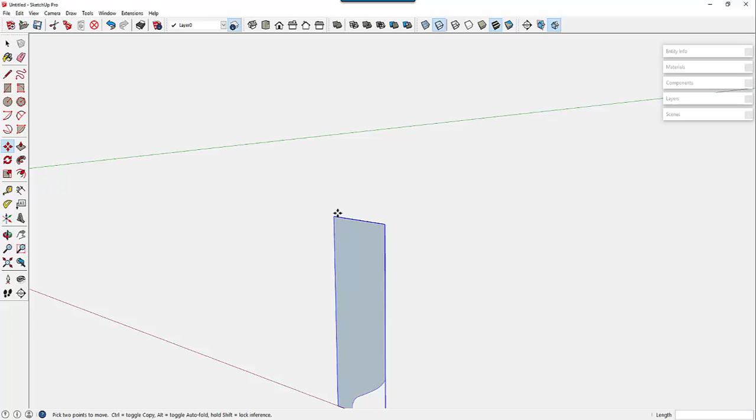To complete the end components, begin by copying the half shape with the Move tool. Move it down the red axis. Right-click on the copy and choose Flip along the group's red axis. Then use the Move tool to mate up the two halves.

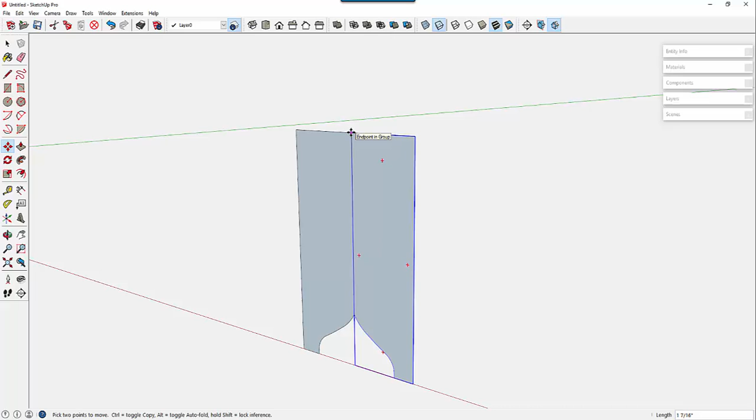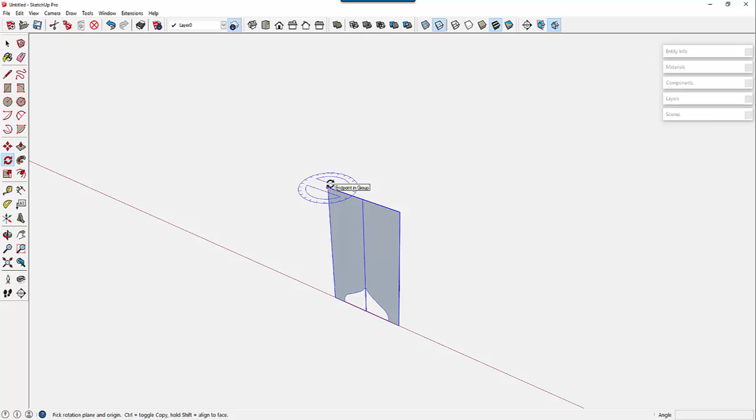Pick the Select tool and draw a left to right select box around both halves. Pick the Rotate tool and click on the top end of the end, then click on the opposite end on the red axis. Rotate the end 90 degrees until reaching the green axis.

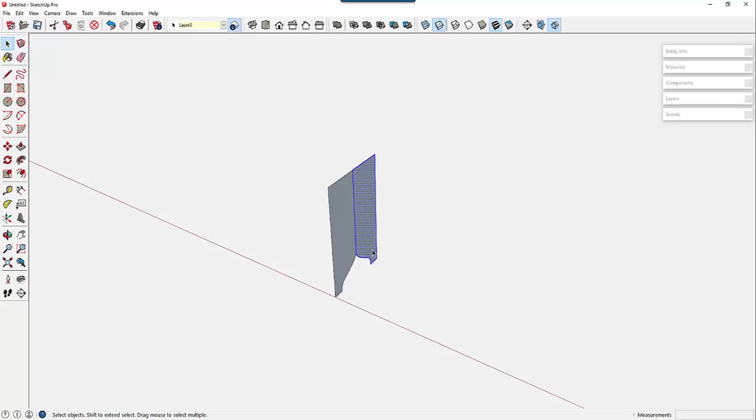Right-click on each half or group and pick Explode. Then, with the Select tool, draw a select box around both halves. Right-click on the selection and pick Make Component from the menu. Name the component End and click Create.

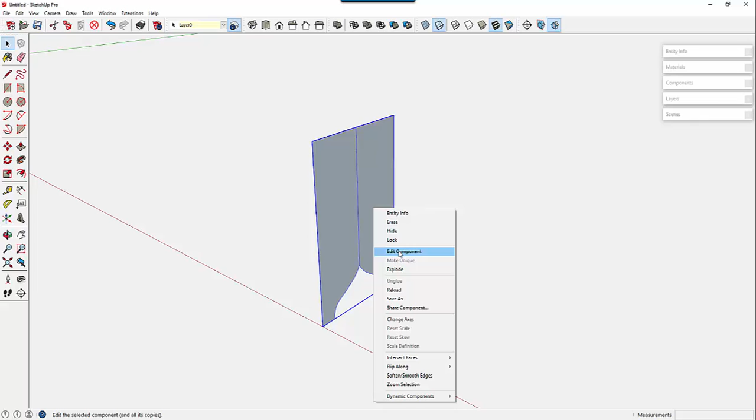Edit the component. Select the eraser and delete the center line. Choose the Push-Pull tool and give the component a 3/4 inch thickness.

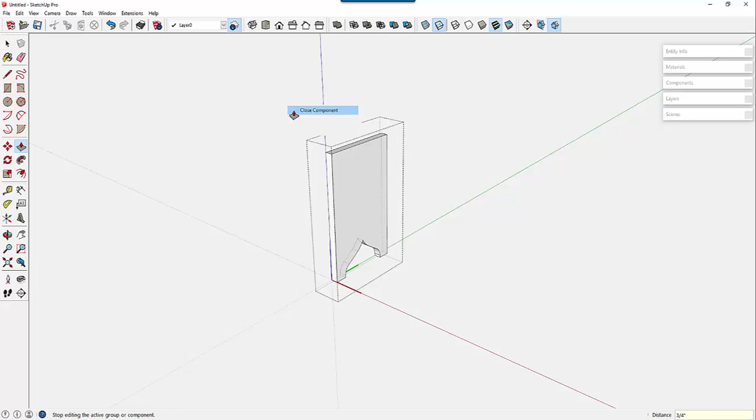With the tape measure, click on the inside edge of the end and move the mouse down 19 inches. That is, type 19 and hit Enter. The outside-to-outside dimension is 19 inches.

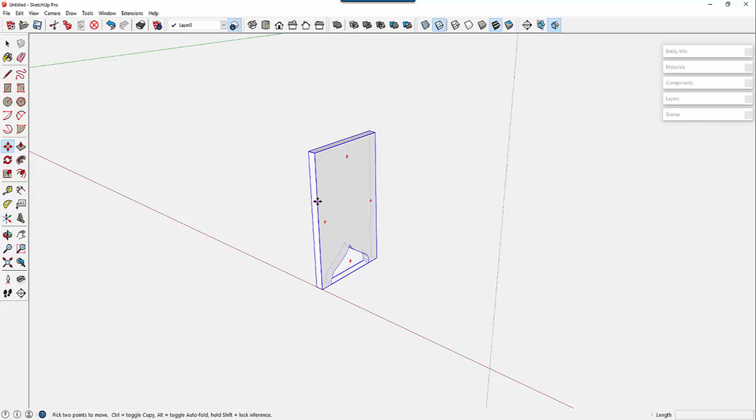Choose the Move tool, tap the Control key, click on the outside edge of the end, and move the copy of the end down the red axis. Click when reaching the guideline. Right-click on the right end and pick Flip Along Component's Red.

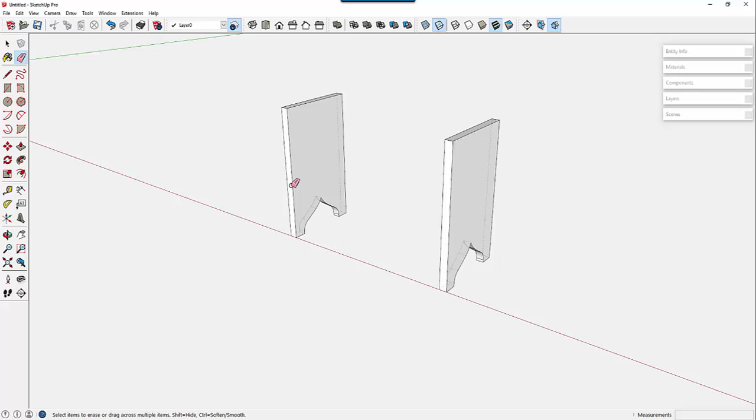Delete the guideline. Zoom in to the inside face of the left end. Pick the tape measure, click on the bottom edge, and raise up a guideline 4 1/4 inches. With the Line tool, scribe the size of the groove.

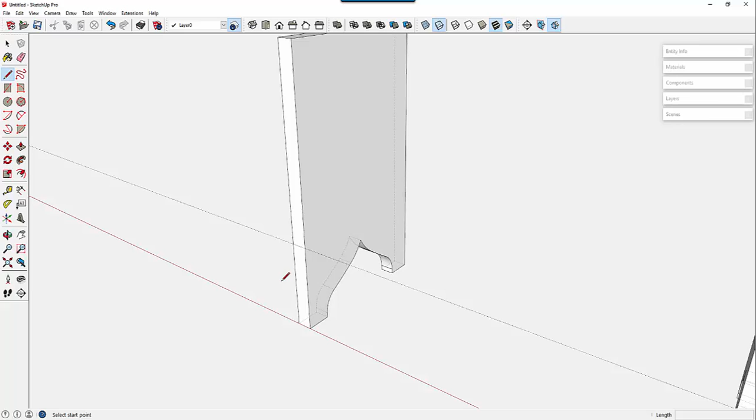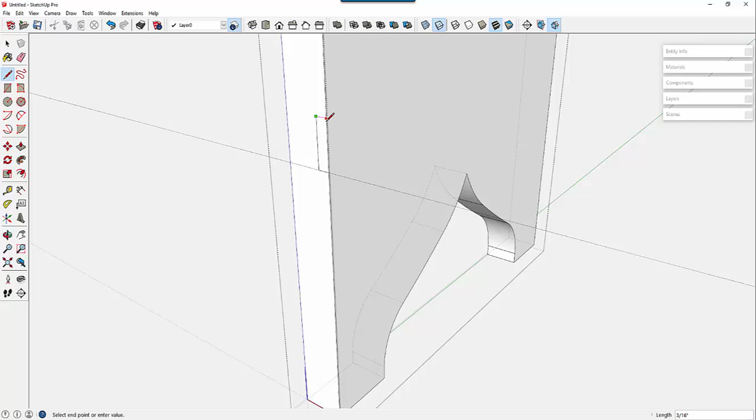Oops, I forgot to open the component for editing, so we need to stop and undo, edit the component, and then scribe the size of the groove.

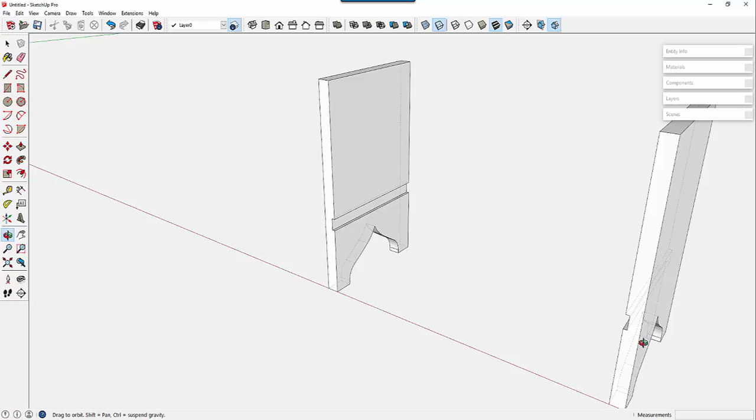It's 3/16 inch deep and 3/4 inches high. The Push-Pull tool will route out the groove. Click on the back edge and then delete the guideline.

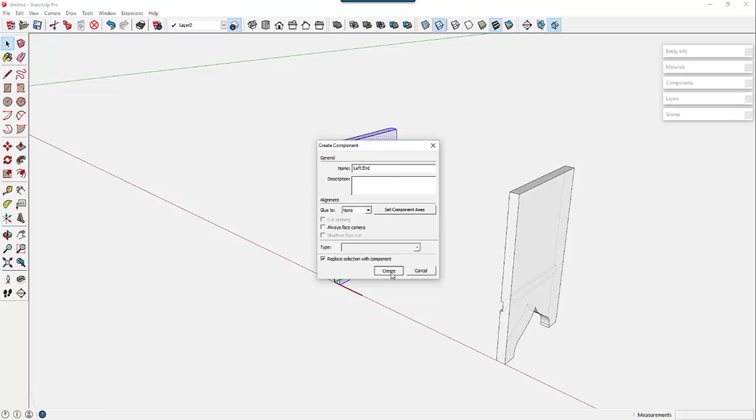Since the right end will have an extra groove for the till, we need to make these two unique components, not the same. Right-click on the left end and choose Explode from the menu. Right-click again and choose Make Component. Name the component Left End and click on Create. Repeat the same actions for the right end, naming the component Right End.

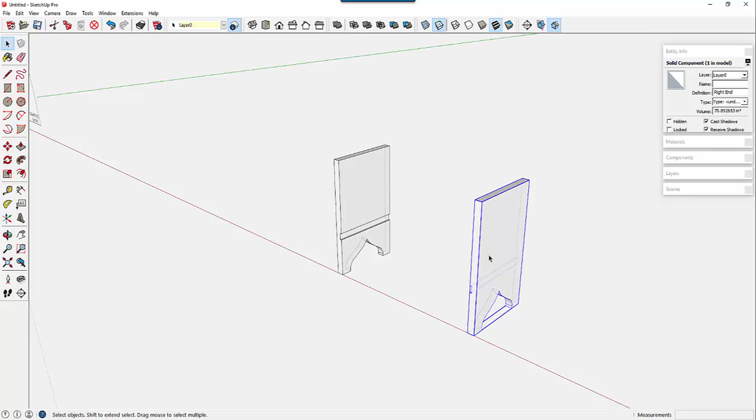You can check the component definitions by opening the Entity Info dialog box up here and verify that the selected component is in fact called right end and left end.

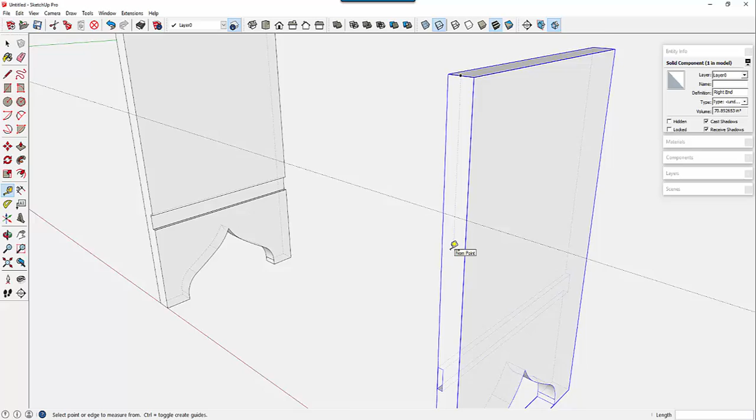Now to the till groove with the guideline. Make a guideline 3.5 inches down from the top edge of the right end. Edit the component and use the line tool to outline the size of the groove for the till bottom.

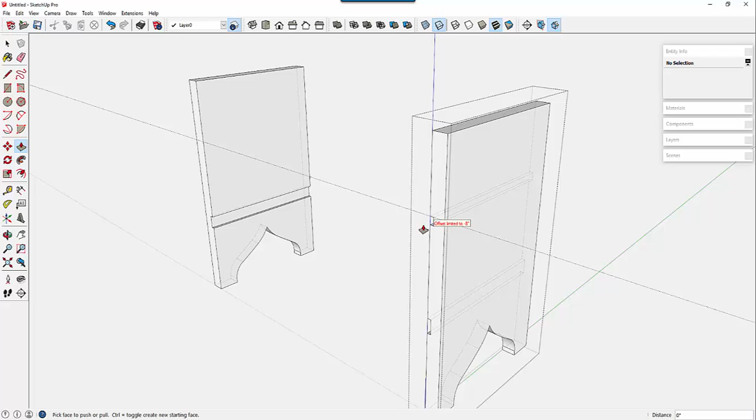This is 3/16 inch deep and 3/8 inch long or wide. Again, use the push-pull tool to route out the groove. This finishes the building of the end components. Erase the guidelines.